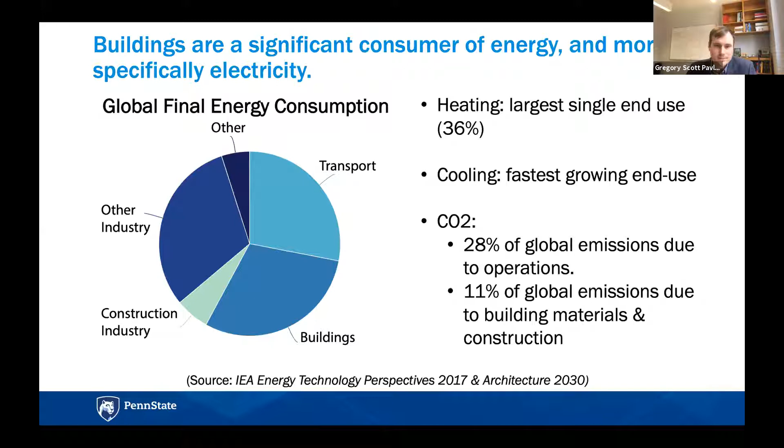So if we want to really address some of these pressing climate issues, we have to consider buildings as a prime sector for improvement. And there's a lot of opportunities today, and I hope to highlight some of those opportunities to improve the building sector today.

And so with the carbon and environmental greenhouse gas emissions taking center stage recently, and over the past several years, we're seeing a lot of targets being established. So recently, discussions at the federal level have been 50 to 52% reduction in greenhouse gas pollution by 2030, carbon pollution-free power sector by 2035, and then net zero emission economy no later than 2050. And so these are not just buildings, right? These are overall emission targets.

If we looked at the state of Pennsylvania, the most recent climate action plan had I believe 26% greenhouse gas reduction by 2025, with 80% by 2050. And then there's a lot of various local implementations. For example, if we looked at buildings, the city of Denver has set goals for net zero energy and all electric new homes for the 2024 building code. And then the same all electric net zero criteria for commercial buildings in the 2027 building code.

And then in New York City, Local Law 97 has established emission intensity limits for buildings over 25,000 square feet. And so these are limits in terms of metric tons of carbon equivalents per square foot of the building that will be enforced. And so I think these all just highlight the need to now identify tangible strategies and pathways to achieving these targets, right? First in specific buildings, and then communities as a whole.

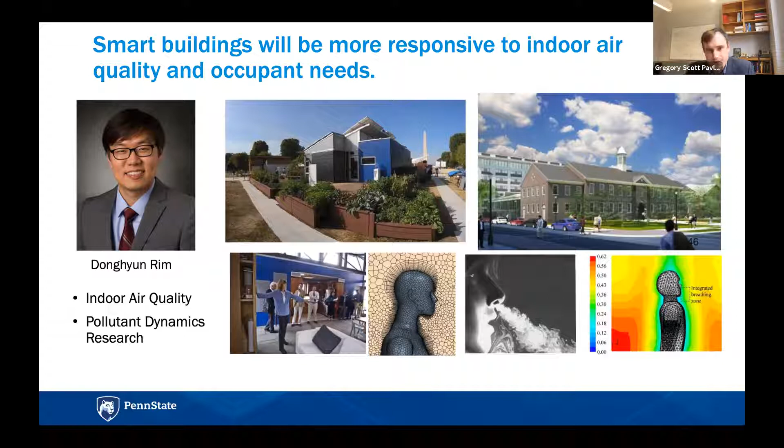And part of this work involves developing a more detailed understanding of how pollutants move through spaces, so the dynamics of pollutants, and also how some of these pollutants may lead to secondary chemical reactions within spaces.

My colleague Yu Qing said that smart cities will definitely need to leverage urban scale models and digital twins. So this is a big area of work in terms of building information modeling, where we have computer representations that are very detailed in terms of what's inside of the building, how they're constructed, where things are located.

And I think these very detailed building information models are being used more and more throughout the design and construction process. And what's not been realized yet to its full extent is how we can leverage these for the entire life cycle for buildings and cities, and also to improve operations. And this is an area where she's working in developing better models and BIM processes.

My colleague Alp mentioned that lighting will be very important, and not just lighting quantities, but the quality of lighting. So LEDs, light emitting diodes, are a lighting technology that have recently become more available and cost effective in residential and commercial applications. And now that the primary technology has been developed, there's opportunities for optimization of the quality.

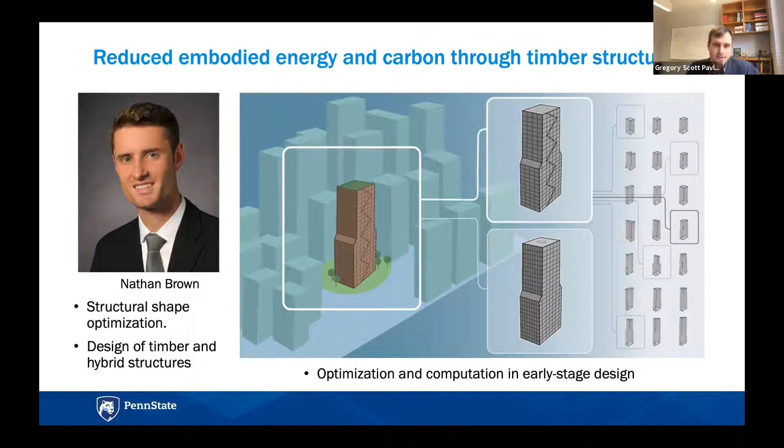So we have to think in a different way about how we design these buildings and use timber so that we have buildings that have adequate structural performance, but that can help us meet some of these carbon and climate goals. So that's what my colleagues thought in the areas that they're working in.

So what do I think, and where does my work fit into this? My work is, as Paul mentioned earlier, really on the control side of the mechanical systems. So how do we, through improved controls and design of the mechanical systems, the heating, cooling, and ventilation systems, make buildings more efficient and flexible? So when I think of smart buildings, I think of buildings that are efficient and flexible. What do I mean by that?

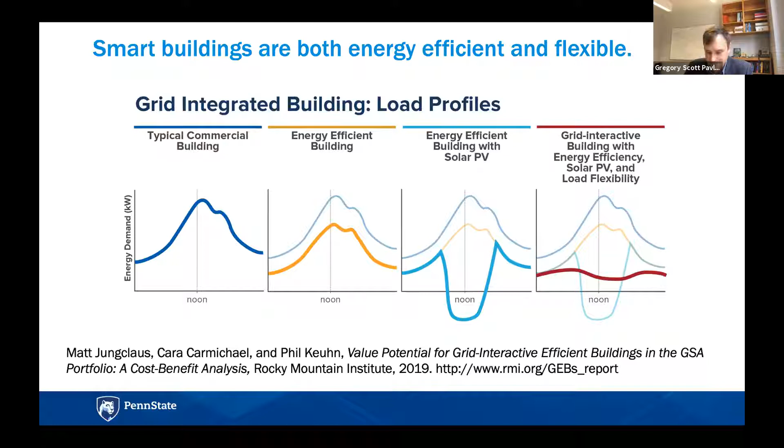And so if we had a smart building, one thing that it may be able to do to help is shift energy consumption in a way that removes these sort of steep ramping events. So we might use more energy during the middle of the day and have that offset some of the energy use during the night and in the early morning periods. And so that's what I mean by flexibility, is the ability for a building to change when it consumes energy based on some information, some extra piece of information that it has.

And so that's really where my work focuses, is new building control approaches to enable efficiency and flexibility. And so an example that you might think of related to this is if you told a building when energy was clean and when it was dirty, what would it do differently? How could it change its energy consumption patterns to use energy when it's clean and use less energy when it's not clean? And so the way that we achieve that is by developing new control approaches that can help the building intelligently change its energy consumption patterns.

And so next, I want to just highlight one of the specific projects that we've done in this area. And a lot of my past work has involved something called model predictive control. This is basically where you take a model of a building that can describe how it uses energy, and you couple this to mathematical optimization routines, and you use the model to basically try out operational strategies. What if I change the temperature set point for this device? What if I turn the system on at this time of the day? And by using the model, you basically try out many different control actions, and you find the one that achieves the objective you're interested in.

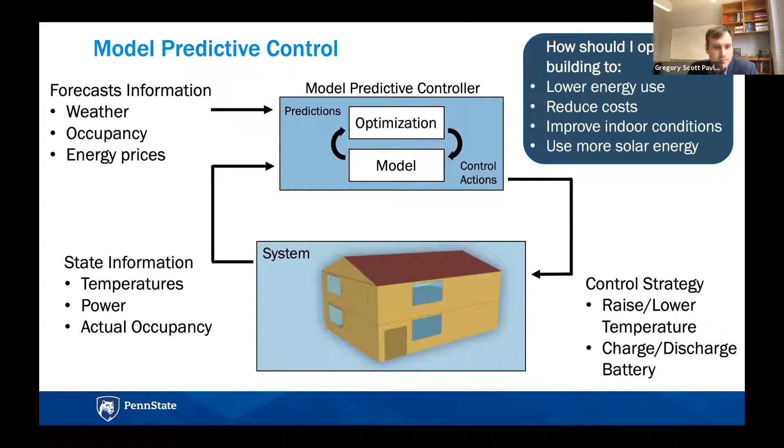It could be find the control strategy that lowers my energy use. It could be find the control strategy that reduces costs. It could be find the strategy that allows me to maximize my use of solar energy. And so this is a technology that's been fairly well studied over the past decade or more by a lot of researchers. But there's challenges in actually implementing this in practice.

And some of those challenges are developing the detailed physics-based building energy model can be time-consuming. It can be costly. If we have a detailed model of one building, it may not be able to directly be used for another building. If we try to use these detailed models within the optimization framework, it turns out it can be very computationally intensive. So we need a lot of computers or a high performance computing environment to solve the problems. And also it can be challenging to explain the output from these. So overall, there's a need to develop methods that are more scalable, transferable, and interpretable. And that's something that we've been working on here.

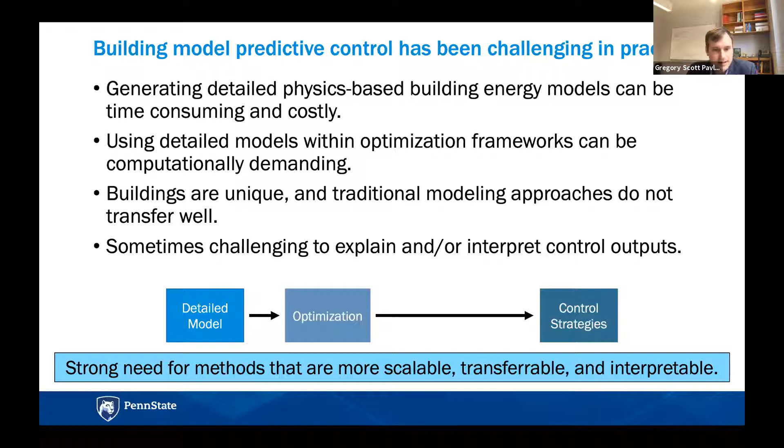And so just to outline three approaches, the first one is the approach that I just mentioned, where you use a detailed model directly for optimization and you arrive at the control strategies. A second approach that's being considered and studied is use the detailed model to train a machine learning model. So this is a simplified model that learns from the data produced by this detailed model. And once we end up with this simplified model, we can use that for optimization and then generate our new control strategies.

The approach that we're taking in this work, I call rule extraction. So here we use the detailed model to do optimization, and we end up with a best set of control strategies. And then after we've developed a whole library of control strategies, the next step is then to feed that to a machine learning process to extract the rules. And I'll show you what I mean in a little bit here.

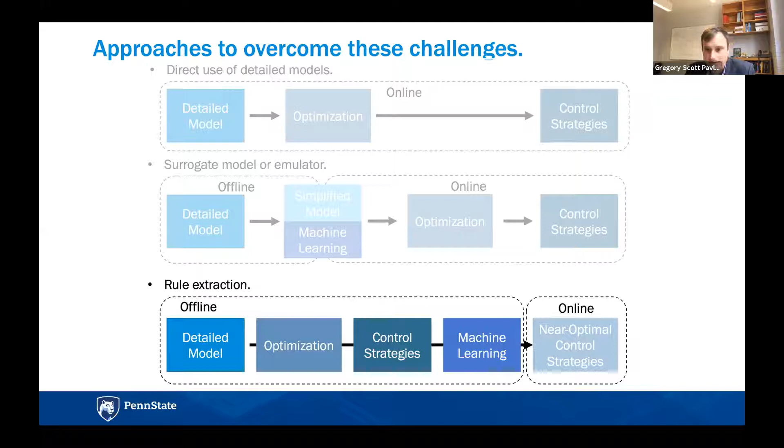But first, I'd like to just mention that a lot of the results that I'll show today are based off of the work that I've done in collaboration with Min-Young Yu. She's a fourth-year PhD student in architectural engineering. And the process that we developed for extracting these rules.

So the idea of rule extraction is think about this process of developing a detailed data set where we know what the best strategies are. And once I have that data set, then the process of rule extraction is to look through that data set for patterns. And I essentially want to pull out any patterns that repeat and that I may be able to reuse for good performance. And that's exactly what we've done here.

So we start with our full data set from the detailed optimizations. We go through a filtering process to select a subset of those solutions which meet our preferences. Once we have the subset of solutions, we group them. We use machine learning clustering algorithms to look for patterns and put these control strategies in groups.

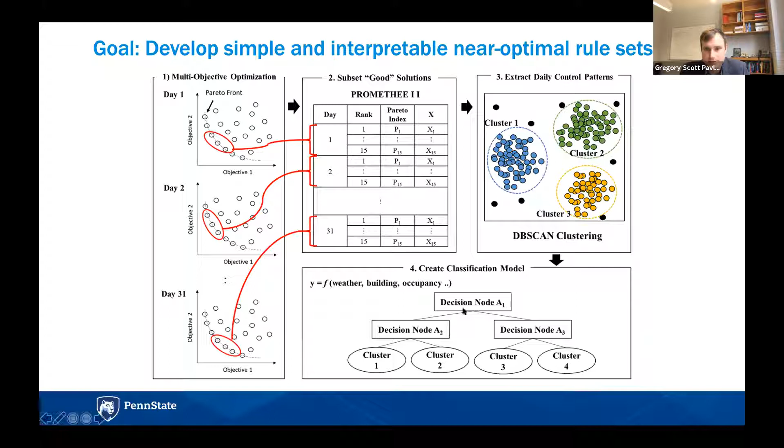And then once we have the groups, we can train another classification model. And the output of the classification model is basically a set of decision rules or decision trees. And that's shown at the bottom here. And I'll talk through one of these in a later slide.

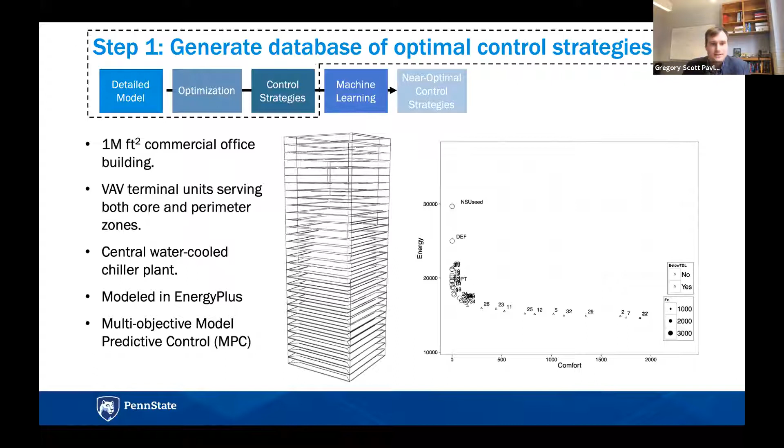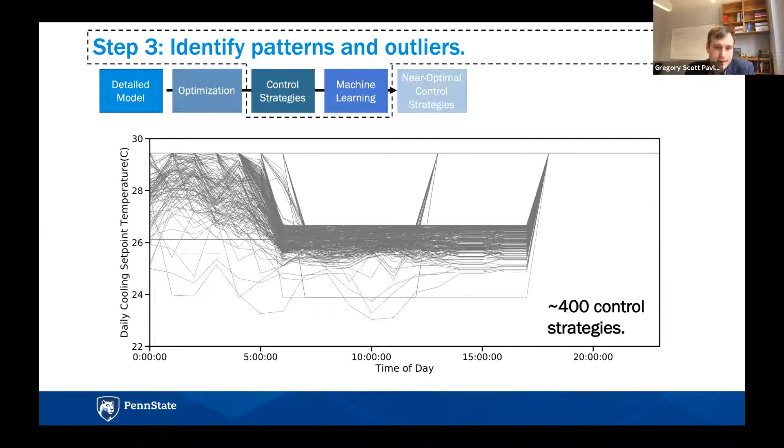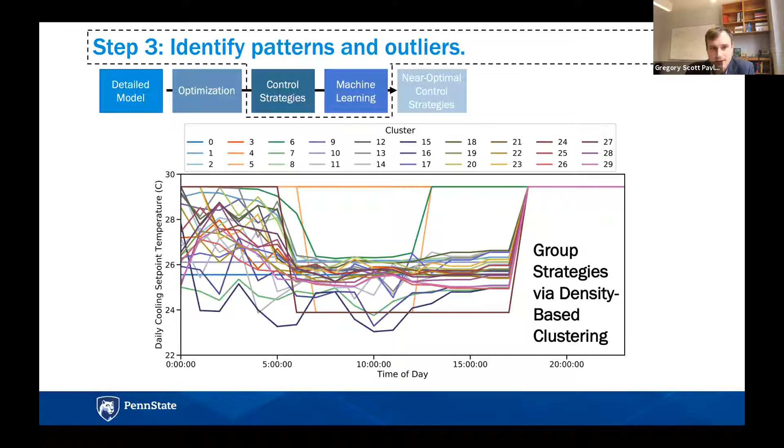And so the next step then is to apply clustering. So we go from having 400 control strategies. After we apply the clustering algorithms, then we end up with about 30. So we've gone from 400 down to 30. And then once we have our smaller set of common patterns, the next step then is to try to decide when should we apply those common patterns. And this is the process of fitting the classification model.

And so we took those 30 strategies, we generated a classification model, and essentially this is the output. This is what it looks like. It's a decision tree where you start at the top and you kind of follow the logic down the tree. And when you get to a terminal node here, the number that's predicted at the node corresponds to a set point strategy for the building.

So if we look at this rule set, we start at the top. So we included occupancy as one of our predictor variables. Occupancy less than 385. This is, remember, a large 1 million square foot office building. So 385 is a low occupancy number for this building. And so at this first level, the model has basically found that a key distinguishing factor is whether or not the building is fully occupied or very minimally occupied.

And in essence, this separates the weekdays when people are at work versus the weekends when they are likely at home. So that's the first branch. If we kind of dig down into this tree a little bit, you can see there's a split on future weather. So if future weather is less than 31, we follow this path. Current weather, if the current weather is less than 26 Celsius, then we follow a different path.

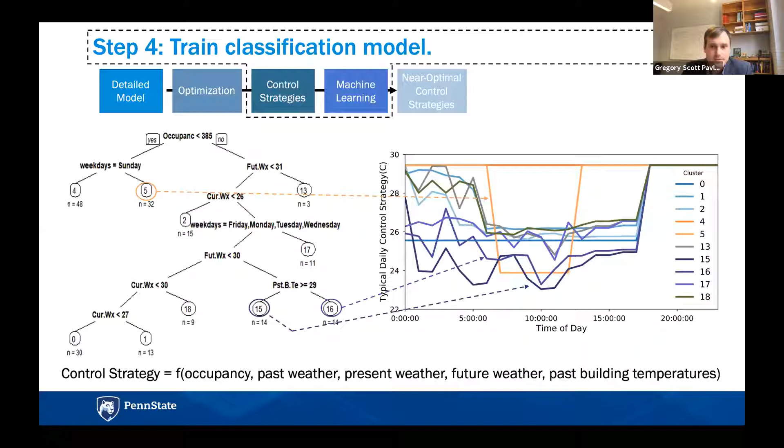And so I think that overall, what this highlights is that using this rule set, we map to these typical control strategies rather than running the full detailed optimization problem. So how well does it work? So after we generate the rules, we want to test those.

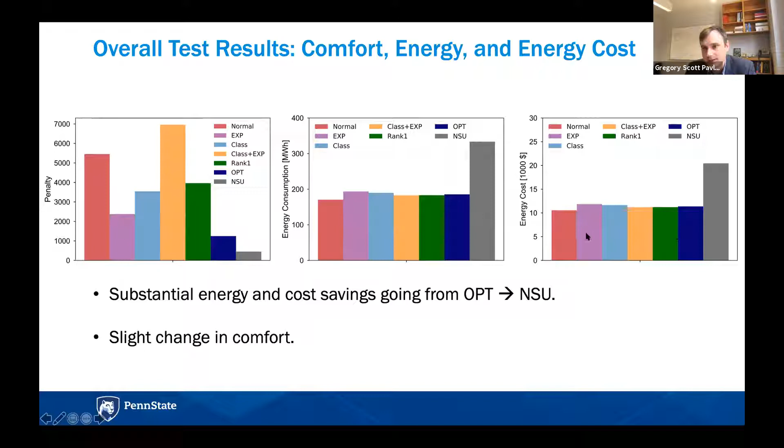And then if we compare now each of these additional colors, green, yellow, light blue, this purple and red color, these are different versions of the classification model, essentially. So what you can see is that there's a big jump in savings from running the fully detailed optimization problem. And then there is not much loss in savings when we move to using these simplified rules.

So, for example, the yellow, blue, purple, and red, these were all using different versions of the simplified rule sets that we just looked at. And so we're able to achieve almost the same energy savings and almost the same cost savings by using the simplified rule set.

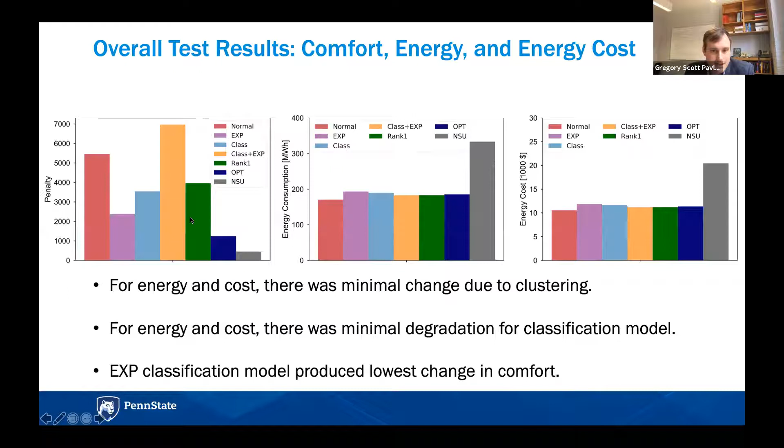And so I think what that means is that it helps us basically interpret this comfort penalty result here. And it says that even though there are some variations in this comfort metric, all of these are fairly low in terms of thermal comfort degradation in the actual building.

So just to summarize, we saw several simplified rule sets performed quite well, and the rules are indeed quite simple and interpretable. So, you can look at the rules and interpret the splits. The limitations of this, we need to do a lot more testing, and we didn't exhaustively explore the feature set that was used to build these models.

But I think just to also comment on where we're hoping to go with this is that now that we have a simple set of rules, our thought is that if the rules are simpler and more interpretable, it may be easier to apply these to other buildings.

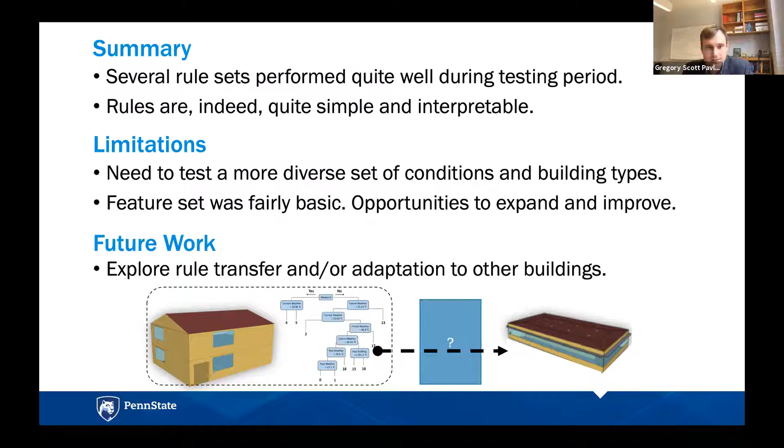So rather than running the full optimization, the full model predictive control for a new building, can we take these near optimal simplified rule sets that we've developed for one building, and can we transfer or slightly adapt them to another building? And so that's an open question, something that we plan on testing. And if that works, I think the result would be that we can help overcome some of these scalability and implementation challenges that come with model predictive control.

So just to sort of conclude overall, I highlighted several technologies and opportunities. By no means is this exhaustive. So this is some of the stuff going on here within the department. There's a lot more across the university and other departments that intersects with this area.

Some of the challenges that I didn't touch on in detail during the talk was this idea of new construction versus retrofit. This is certainly a big challenge for smart buildings. Technologies that work well when you have all of the design variables and opportunities at your disposal may not be appropriate for retrofits. So I think that's still a very challenging area.

Something that we're encountering more is what I would call option paralysis. There's a lot of products being labeled as smart and being for smart buildings. And with all these options, it's almost impossible for any one person to know the details and be able to distinguish between which ones work well or which ones serve the function that is needed. And so I think that leads to a lot of slow adoption of some of these technologies, because it's hard to pick one, right?